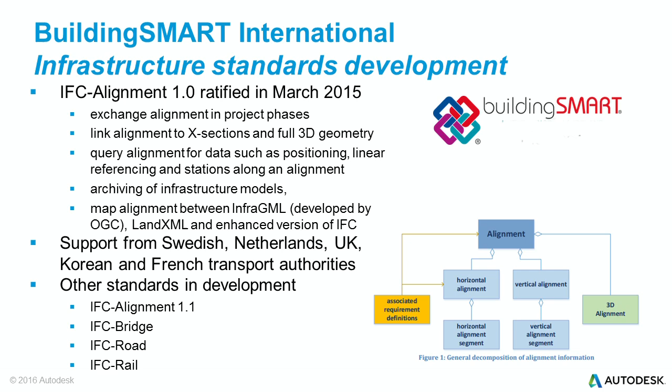China has developed IFC rail, and again, they need to include the IFC alignment. So when you design a road, the core is the alignment, and then the additional part is the road, the rail, or the bridge, so that the bridge sits on the alignment. I'll explain a little more why this is valuable later.

That's an international group. Let's look at a couple of countries. In Holland, Rijkswaterstaat, the National Roads Agency, has been running a program for the last 5 years to have projects deliver better information back to the client. They adopted a standard called COINS, basically a set of documents and data, coming in a zip file that includes a database of structured information - the detail on the assets - GIS, large-scale information, documents, drawings, PDF documents, spreadsheets, and 3D models. It effectively comes as a zip message.

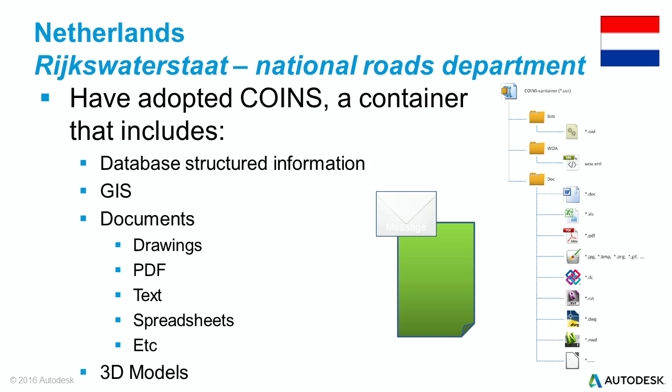The COINS container includes BIM data, structured XML data, and formats like Revit, IFC, DWG, and Navisworks. So it includes the documents, but effectively when the client receives a pack of data, it has everything they want. The COINS schema describes what needs to be in that.

They've now done a number of projects on this, and here's an example of the data that could be found on an object. They're now able to integrate the database and link it to the model data and the geospatial data, so they really are now receiving rich information about their projects, including structured data as well as the geospatial and civil information.

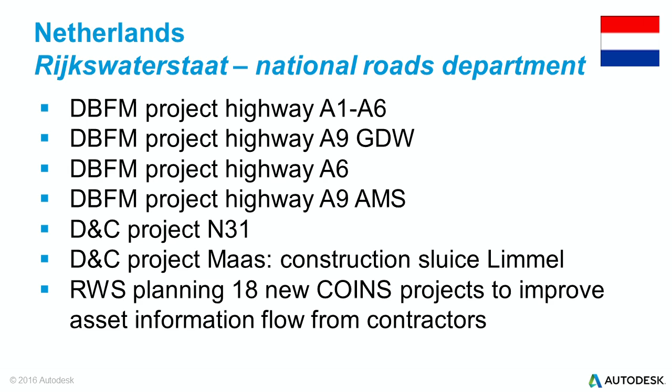Here are some examples of projects that they've already delivered which have submitted COINS information back to the client. So this is something that really is happening. What's great is that the supply chain is learning how to deliver projects in BIM, how to create a COINS data package, and the client receives this better information to introduce into their asset management systems. So they are on a very good learning program in Holland on this.

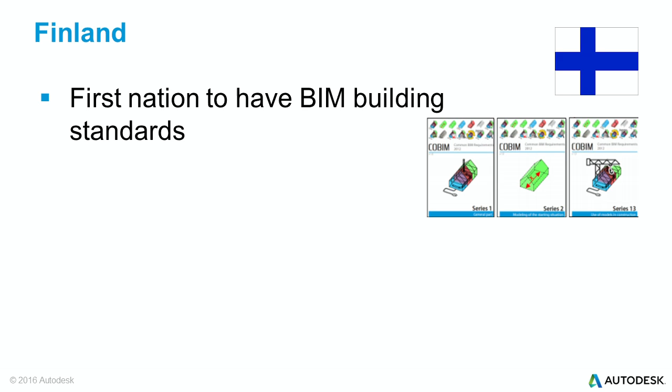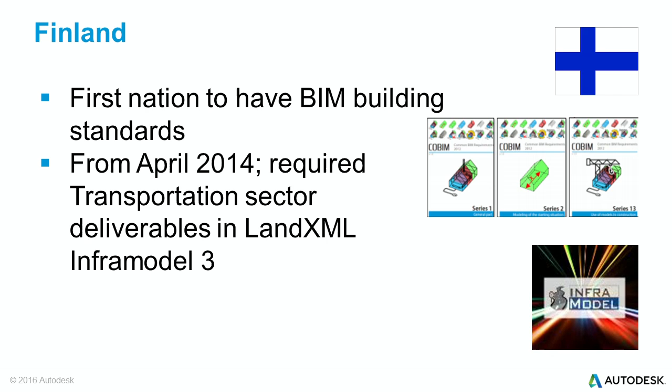We look at Finland. Finland was the first country in the world to have a national BIM standard. These came out, I think, in 2009, so they've had them for a long time. From April 2014, they required the transport sector to deliver in a format called Land XML Infra Model 3. Land XML is a standard for exchanging essentially transport data, and it can link to geospatial and civil engineering tools. Infra Model 3 just includes additional data parameters that the Finnish road agency wanted.

In Germany, they've recognized their inefficiencies in construction, so they've set up a national reform commission for delivering BIM. This year they've actually got an official statement of BIM in their public procurement, so now specifying BIM as a requirement. They have a BIM working group called planen bauen 4.0, and they are doing a phased rollout of BIM across the whole country. Autodesk is the first private sector company to get involved in planen bauen.

As a company, we've committed to helping the German BIM initiative to be correctly developed. The good thing is that the Germans are not trying to do everything - they're doing it in a phased rollout, learning as they go, focusing on the priority aspects first.

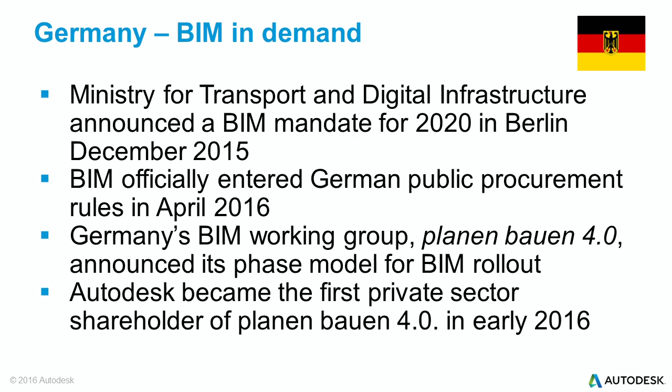Just some examples from America. America does a lot of BIM, so they've been doing BIM for many, many years. This was a project which I thought I would share, which is from the US Army Corps of Engineers, part of their military team. They have a huge number of assets around the United States and internationally. And the National Institute of Building Sciences, NIBS as it's called...

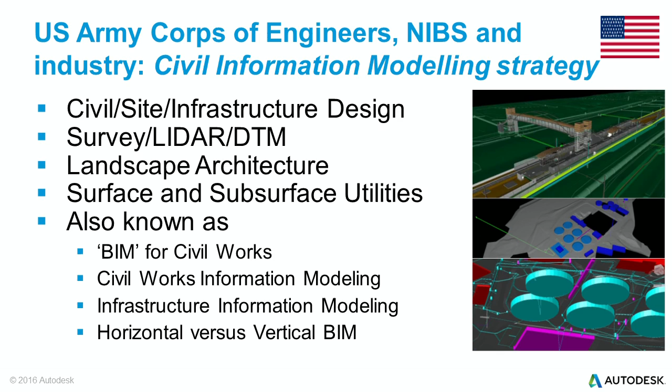They did a project called Civil Information Modeling with industry. They looked at the data we use in civil engineering - civil data, geospatial data, survey data, data for subsurface utilities, pipeworks, electrical cabling. They came up with the idea of BIM for civil works, which is civil information modeling. They looked at saying that typically GIS covers a number of areas going from the world down to sort of a land parcel. When we look at BIM, we tend to talk about things like structures, bridges, buildings, physical assets.

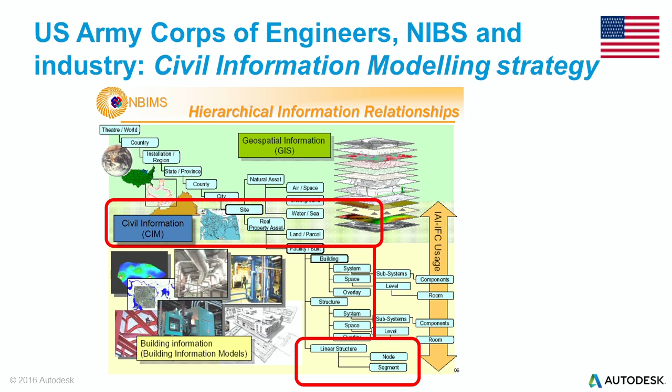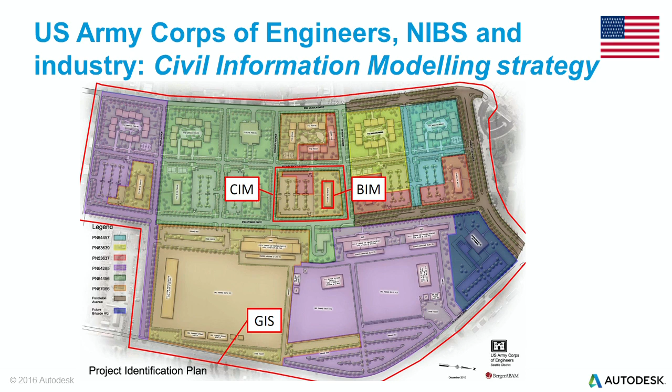And they said that there's a piece in the middle that is poorly handled, which is the more detail around the project area for civil engineering projects, which is where they're focusing this civil information modeling on. And so this study looked at that. And so this is the kind of way of saying that GIS covers the whole area, BIM is the building, but CIM is the project. So that was their kind of idea of saying, well, let's focus on the specific information that we might need there and how might we create it, how might we develop it. That's what that project was about.

This was a report that just came out this year from the US airports. It's an airports report. It had many, many airport clients involved as well as supply chain. And they looked at how are airports in America adopting BIM. In truth, they are doing very well. They've got a lot of projects in BIM, but the client isn't entirely in control. It is mainly being done by the supply chain, the designers and the constructors.

And they found there's some lessons in terms of the clients don't really have much guidance on how should they do BIM and how should they do BIM into facilities management. They don't really know what is good BIM and what is bad BIM. So they need to develop some key performance indicators to show performance. They need to understand how to deliver a return on investment. You know, how do I know that the BIM has given me a payback? Whether it's on the project or it's in operation. They need to learn about this. So they've kind of identified the problems.

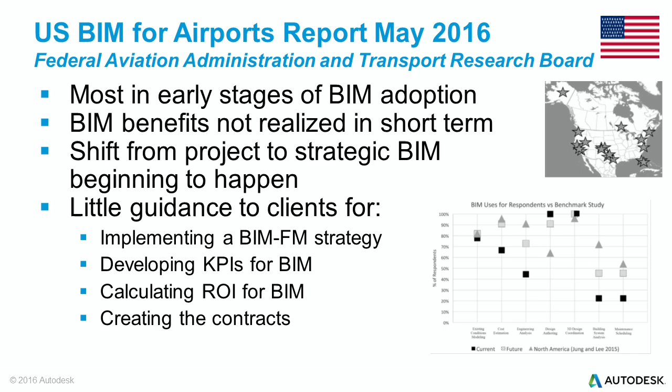And the final one, and I think this is a big problem everywhere in the world at the moment, is including BIM specification in contracts is a struggle because most contracts are very traditional, they're kind of CAD-based, they're very restrictive, and actually with BIM we share models, we hand over intellectual rights, and this is not clear in current contracts. So they know that that's a gap.

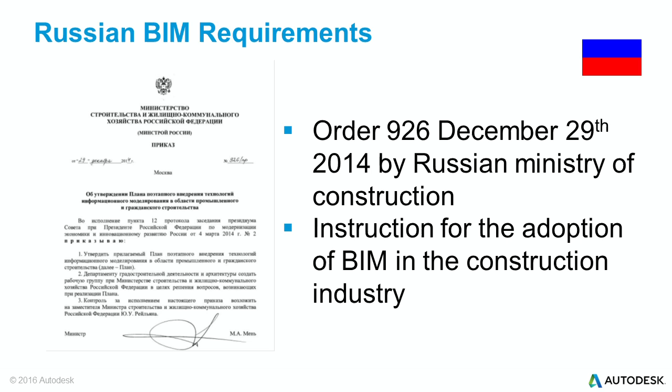Here in Russia, already since December 2014, you've had an instruction for adoption of BIM in the construction industry, and I'm sure that's part of the reason you are here. So this is extremely positive, and you're obviously aware that we've had some BIM standards that Autodesk helped support in the development of. So you've got some guidance on how to do BIM on the project, and this is a great starting point to learn about the beginnings of what should I do if I'm a building designer, and what should I do if I'm a civil engineering designer in my project. So you've got some excellent starting position for learning about BIM on your project.

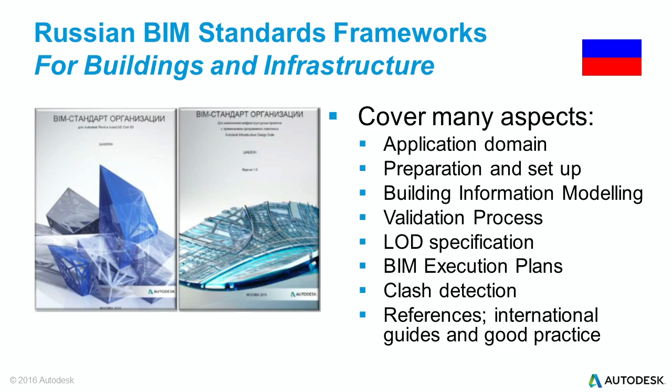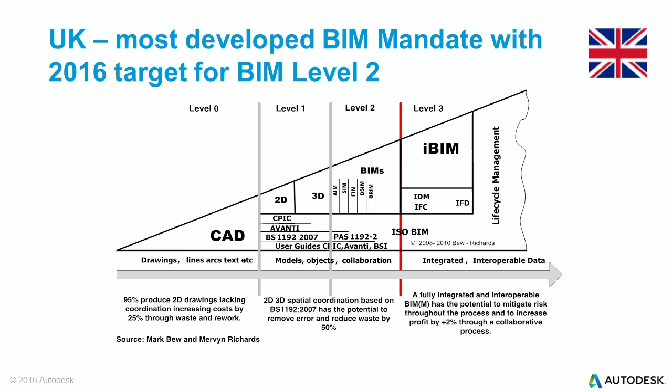So I'm going to spend a little bit more time now just talking about the United Kingdom, where I'm from, and our Level 2 program. So from April this year, every centrally funded public project has to do BIM. There's no question they must include BIM in their specification. And we are trying to achieve a thing called Level 2, which is on this graph, the red line. Level 2 is just a set of procedures and technical requirements that need to be included in the execution and delivery of a project.

This is very complicated. So what we've done is we've tried to help industry by developing a number of guides or standards for how you will do work. We focused firstly on collaborative working. How do I share information with my colleagues on a project? How do I deliver a project in BIM? What should I do with BIM data in operation? What data format can I help to share my information with the customer? How do I specify a project? I'm a client, I have no idea, I have no understanding of BIM. So tools to help the client specify.

What are the contractual changes, the commercial amendments to contracts I need to make? How do I classify things? Can we name assets consistently in our projects? This is a massive problem. In the UK, I'm going to use English language, some people say it's an elevator, some say it's a lift, some call it a vertical transportation system. Are we talking about the same thing? Who knows? So classification, data security. Obviously, we live in difficult times. Can I make sure that the right people are seeing my data?

Because much of our construction sector, we are creating critical assets for the public, make sure that the data about those assets is properly secured. How do I prepare the client, the whole organization, to adopt BIM? How do I include operational information and requirements in specifying projects? How do I train the academic sector? How do we get the right requirements in education?

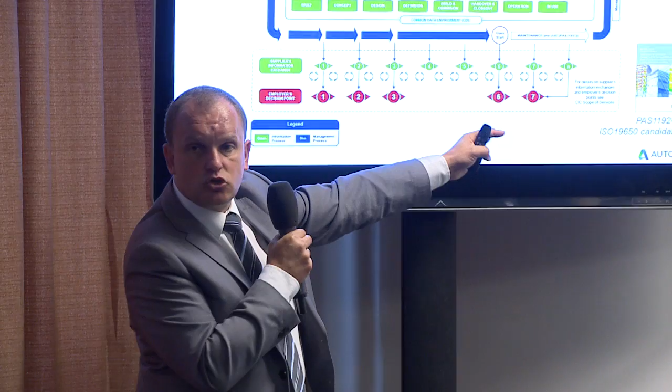This is just a little bit more detail about our capital project delivery process. I'm going to stand here. So this is a project starting from briefing through design, construction, into handover and operation. And we talk about the idea of data exchanges or data drops, where the project must give the customer some data so the customer can check, are we doing what is required? And these are these data drops. How does this all work?

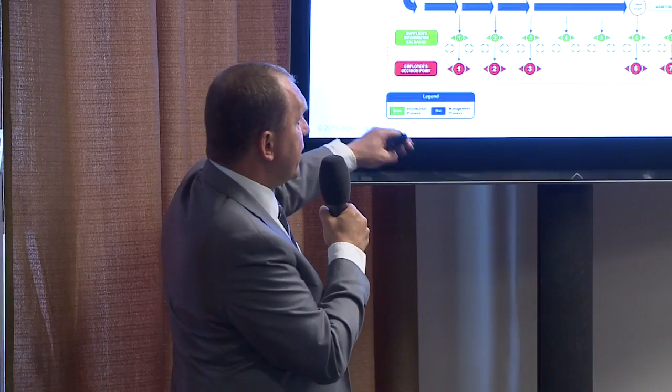Well, actually, it all starts in the top corner here, which is a thing called the employer's information requirement. Now, this is where the customer says, this is the data I need at these points in time, so I can be happy that the project is going to plan, and this is the data I need here at the end, so that I can run my new asset correctly.

Now, this is a massive problem for clients. Most clients buy something cheap. Now we're saying, buy something to meet your requirements. So you need to know what your requirements are. So this is actually a big, big area. So if you're a customer, if you're a client, to do BIM, don't complain if your project didn't do what you wanted, if you didn't ask for what you needed at the beginning.

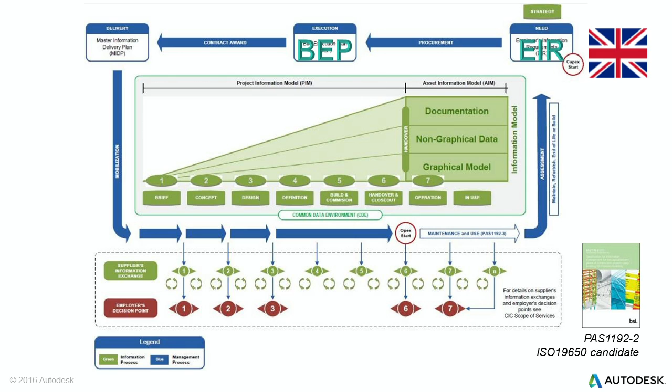Okay, so the client says what they want. The supply chain then delivers a BIM execution plan that says, this is how I will deliver your information. And the successful bidder, who's best BEP, has to then create a master information delivery plan. The big detail on exactly who will do what at what phase. And once you've got these plans in place, you've done a lot of planning, what tools you're going to use, who's going to do it, to what level of information, you can then go ahead and deliver your project.

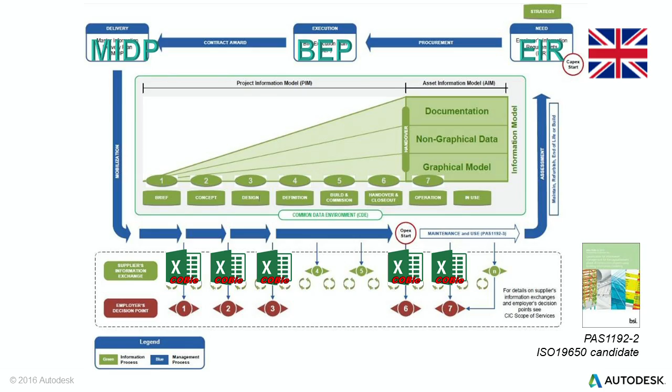And in the UK, we have suggested that we will exchange the data, not models, but the data using a format called COBie, which can be delivered as an Excel file or as a database. So this is quite hard, but we are learning our process at the moment on how to achieve this. But particularly the BEP, MIDP, and the EIR are a real big focus. Ask for what you want, say how you're going to deliver it, and then show the full detail on it, and then go ahead and do this. And I'll come back to this later very briefly.

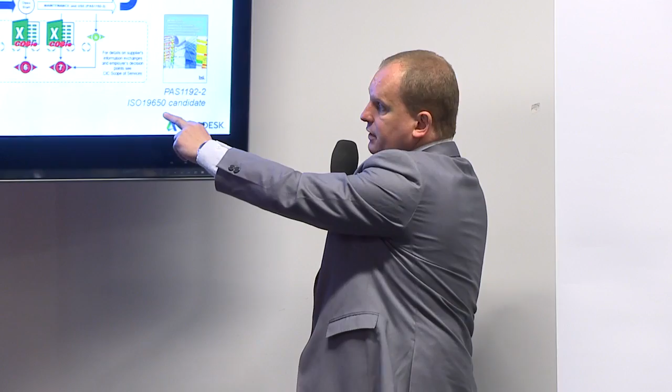Oh, sorry, I just want to say one more thing. This standard, PAS 1192 Part 2, is our BIM for projects, and it is being developed into an ISO, an international standard, ISO 19650, and that is due for publication in just over a year's time. So the UK approach is being adopted as a good role model example for the international community. So this will be the basic framework for future BIM on international projects.

And they've said that BIM is our lifeblood. It's our central nervous system. This project will not be delivered without BIM. And they've come up with this whole BIM framework and model. And I'll just explain a couple of things on this picture. So this is, how are we going to do it? We're going to use collaboration. We're going to get it right first time.

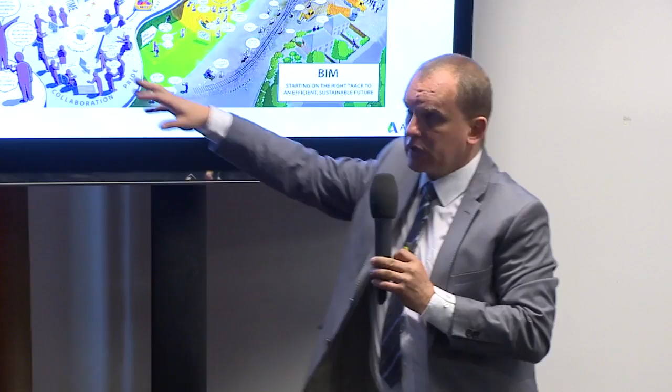And up there, I don't know if anyone can read it, but it says 150 years. They know that the railway line is going to last 150 years. In the UK, and I'm sure here in Russia, you have railway lines that are over 150 years old. When we build infrastructure assets, they're not for 10 years, for 20 years, they last centuries.

And they've got a little picture here of the devil. And the devil is saying, come back to doing it the old way. And this is the trough of despair with risk, which is where we are today. They don't want to do it that way. So they've said that BIM is a way of setting excellence in their project preparation, design, construction. And they've even said they want to build HS2 three times.

They want to design it in BIM. They want to construct it in BIM. They even want to simulate it and run it in BIM before they actually build anything. So they want to use BIM to fully iron out any problems before they actually break ground.

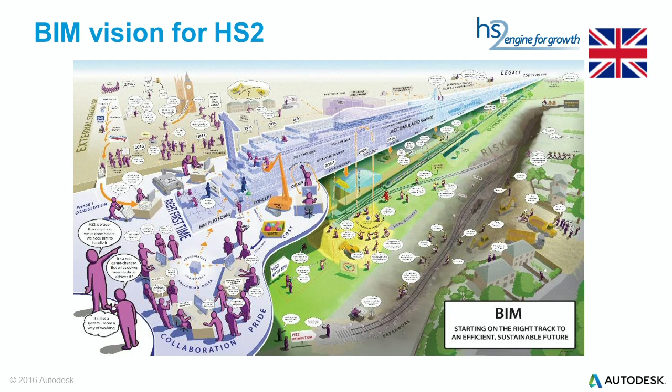So let's move forward. So how are we at Autodesk helping? Well, a lot of what you've seen and a lot I talked about involves some technical stuff. There are things you have to do, which isn't just modeling. It's actually creating and transferring data. So firstly, in civil engineering it has always been very hard to add additional attributes, the extra information around the model objects. So we've actually done a huge investment, which I'm pleased to say I was very much at the heart of developing, to add extended property data to Civil 3D objects.

So effectively, you can have definition of property sets. You can create your own property sets. They can be Russian property sets, they can be client property sets, they can be whatever you want property sets. But essentially, for a model object, you can say, I can add extra information. It's not just what came out of the box, I can add extra stuff. And this will become clear later.

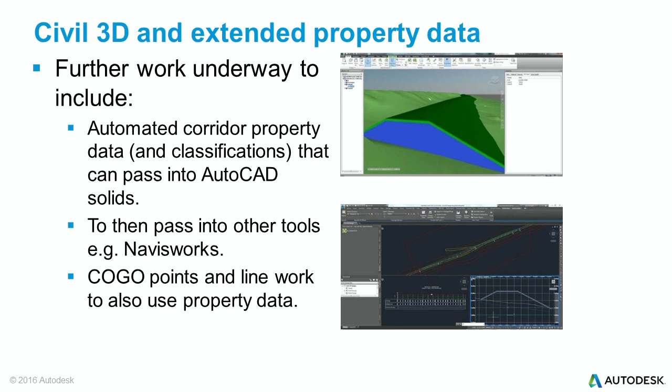And we're doing some further developments around corridor development, and all of this is actually trying to pass the data through the process. So it's less about the modeling in civil engineering than it is to get more data to flow through the different stages of a project. We can apply classification. I mentioned how you name things, the description of the objects. Well, of course you can apply classification to civil objects.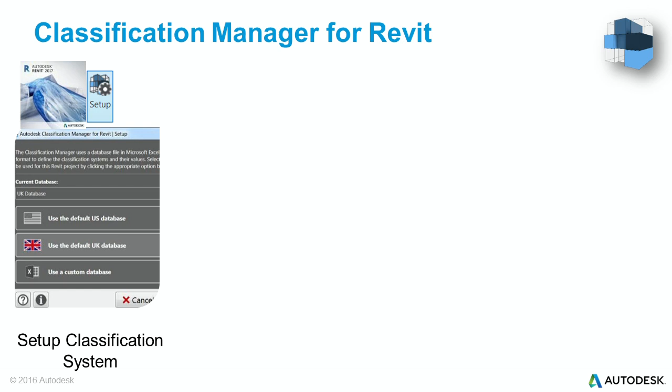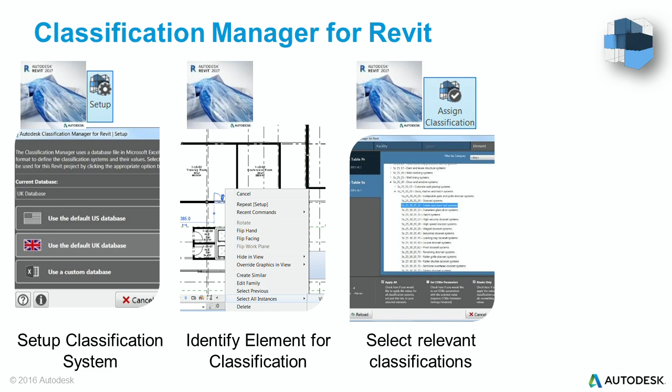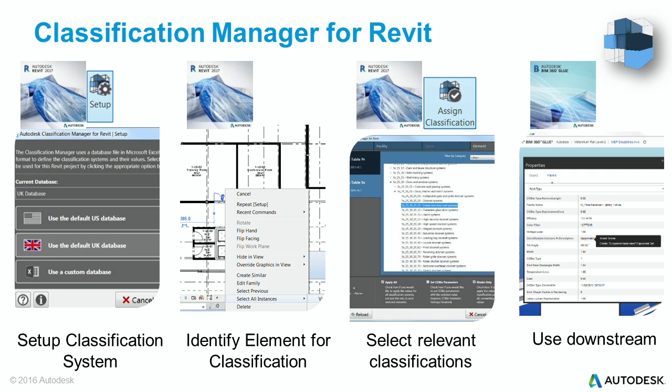Main one is Revit. So in Revit, we can set up a classification system. In the UK, we use a thing called Uniclass. You identify the thing that needs to have some classification. You then select the appropriate classification for it, and you apply it and use it somewhere else. So effectively, you pick on an object, you say, add some classification, add the classification, and then that is now on the object. You can do the same thing in Civil 3D, using these extended property data sets.

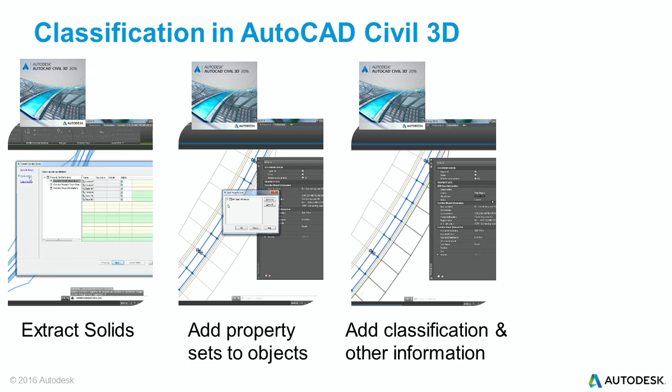So first, you have to do a model, and you extract it as solids. And then on that solid object, you add a property set. So you actually create the property that you want. And then you add the classification as a property. And then, again, that data is now available later in the process. You can get COBie. So COBie may not be relevant to you at the moment.

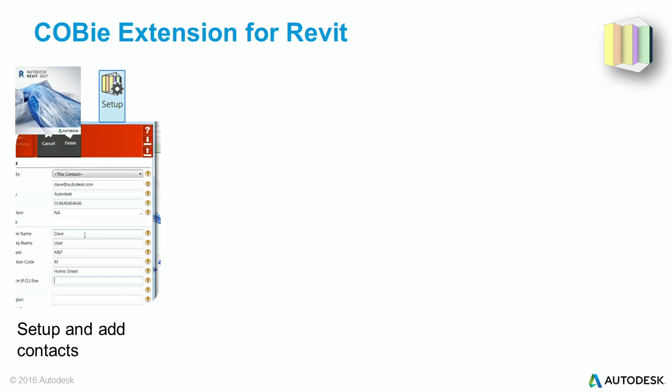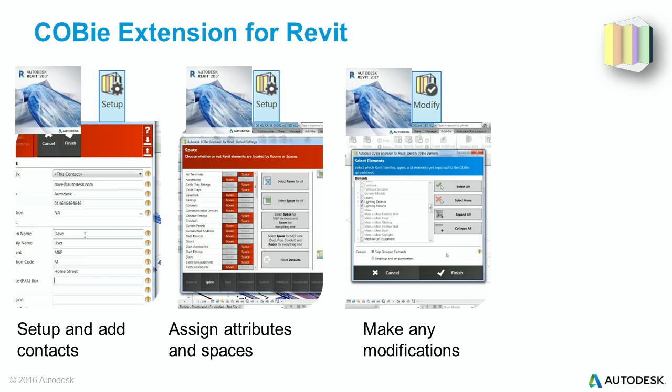Don't worry about it. I'm going to go through this quickly. COBie is a standard structured data set from Revit. We can do it because we have an extension for Revit. So you set up your basic COBie data, you assign fields, you make any changes you want, so you don't have to send all of the objects out. You just say, I only need to extract the information that my client has asked for in their information requirement. And then you have the COBie Excel file. So we are automating the generation of a standard structured data set.

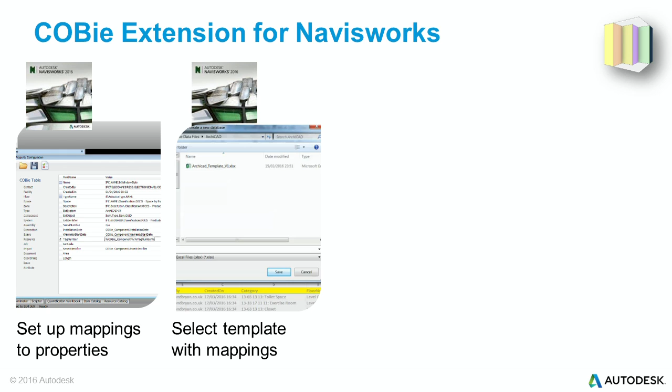We've got a Navisworks extension for COBie. Now, this becomes quite interesting. You know, if we've got it straight out of Revit, why do I need it from Navisworks? Well, because Revit is one product. I may have model objects from not just Revit, but from Civil 3D, from third-party products. So by doing it in Navisworks, we can do exactly the same thing. We set up our, this field maps to that field in COBie. We then pick the template COBie that we want to use, so we fill it into this one. We import the model data, and then we export the file. So we're absolutely simplifying the process of generating a structured data set.

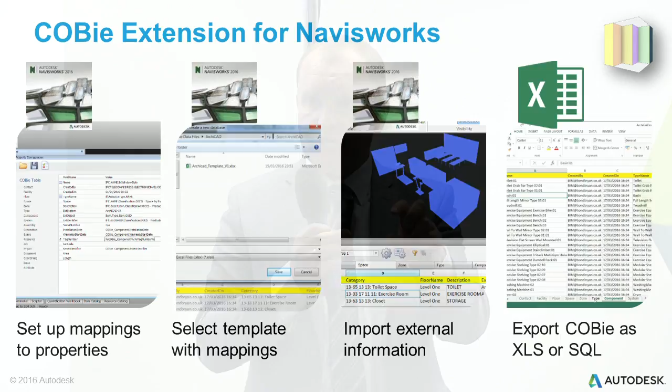Now, this doesn't matter that it's COBie. This is information that a client may want, and they can use that into asset management systems. So they now have data. It's not about geometry. This has got nothing to do with the model. This is, I have these assets, and I know what they are. And actually, most of the data gets filled in the spreadsheet by the manufacturer, the details. The constructor fills that in.

We can even test models. So we have a model test. If you have a set of rules, so standards that you want to obey, we have a model checker that's available. So you select the model checker, you configure it to follow the rules that you're after. You run your checks on the model quality, and then you finally run a report saying what parts of the model meet the requirements that were set. And again, from the UK process, some of this would be defined in the employer's information requirement. So this is a technical way of meeting something that was described at the beginning of a project.

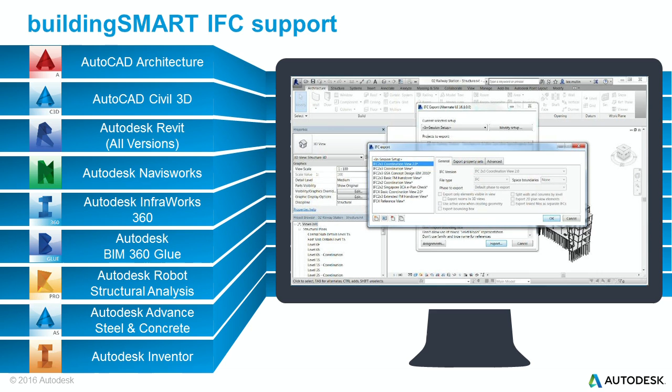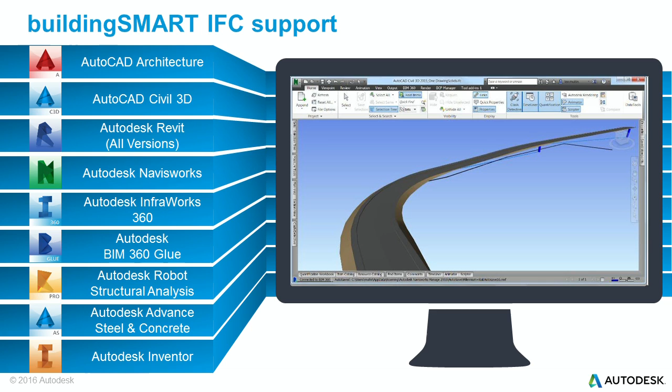Now, interoperability, I mentioned that American report that said about $15 billion of lost productivity due to poor interoperability. I will argue that today we have less problems with sharing information between technologies, using those buildingSMART standards of IFC. As a company, we are massively supportive of this. We support it in around 17 different products, both in building design, civil design, and even in tools like Autodesk Inventor from the manufacturing side. So we're very happy to share and use IFC data. It's an open standard. It's not an Autodesk standard. We're happy to use it. It's not perfect because it doesn't work in every situation, but we're happy to support it, and we will happily support future developments of IFC.

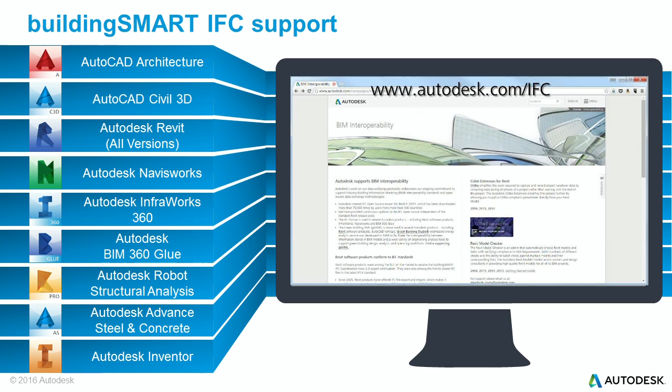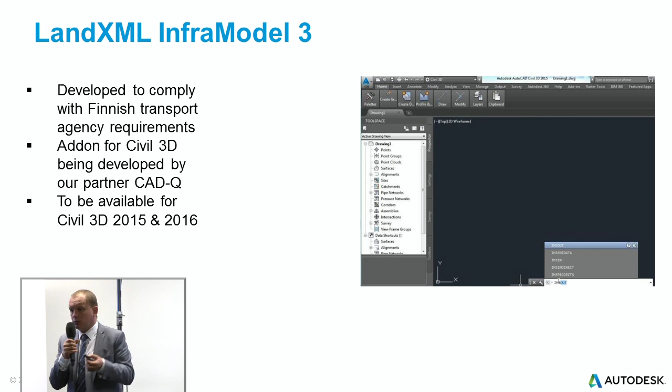I mentioned LandXML from Finland. So we funded a development into Civil 3D for LandXML InfraModel 3. It's an add-on that gives you some additional functions. You can import a LandXML file. It gives you some warnings if things have not fully transferred, but this is a full import of a LandXML InfraModel 3 file. And I actually exported it and then re-imported it, and you see it was the same data. So it can allow for round tripping, even though that's not a main intention, but the thing is working. So we're already supporting a different standard that was a client requirement.

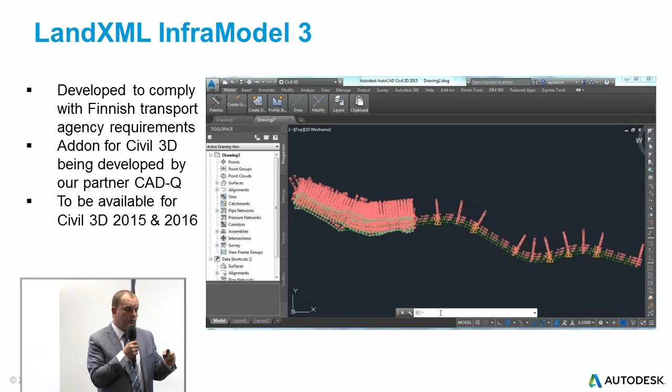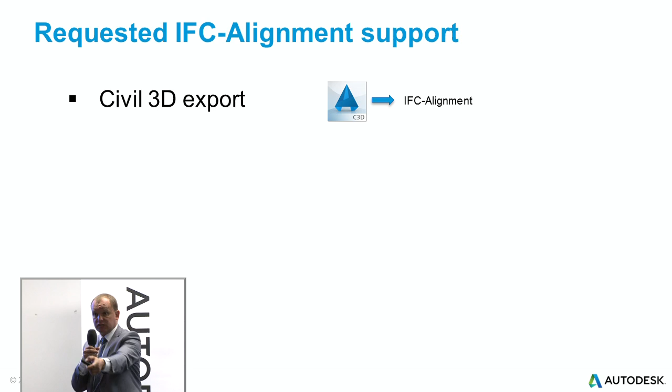We've also been asked to support IFC alignment, which I spoke about earlier around the infrastructure standard for IFC. And the first place is you need to have it out of the civil model. So I've got a road design or a rail design. Can I create the alignment to take that out so I can use it somewhere else? So first request, IFC alignment. Why do I need that? Well, perhaps so I can bring it into Revit. So that alignment now helps me coordinate, for example, a bridge deck.

So that bridge is now set in the correct position. I'm not having to guess. The alignment matches. So this is all about coordination of different stages in the process.

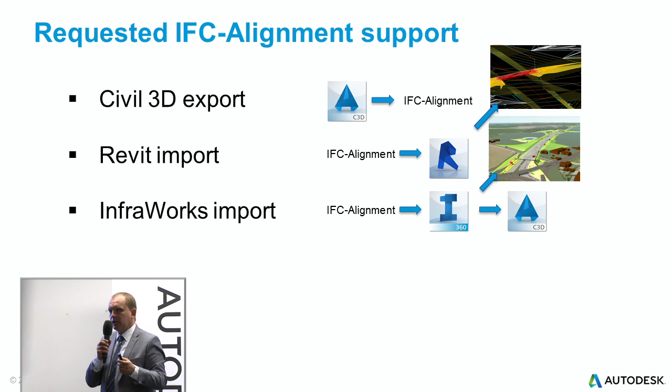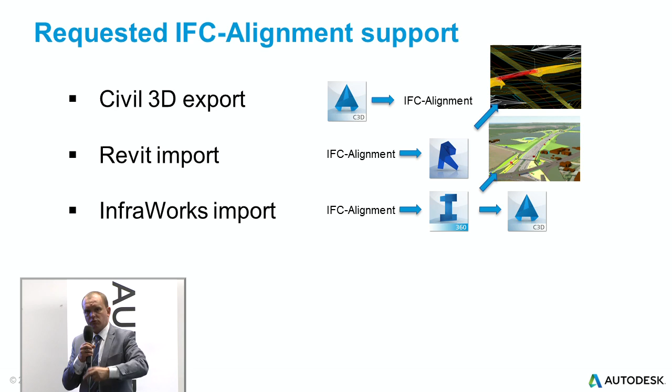Talk about doing it for InfraWorks. Now this is where it gets very interesting, because if your customer says, this is the alignment we want to follow, but all they've been able to do is draw a single line. They haven't got the technical ability to do all the detail. You can take that alignment straight into InfraWorks and immediately create a road or a rail or a pipeline, because it will just translate it into a full object.

Now you can do some optimization on it, and potentially, as soon as you've brought it into InfraWorks, it automatically allows you to share that alignment in Civil 3D. So we have an automatic import into Civil 3D.

We've been asked to do it into Navisworks, because we talked about coordination here with a bridge deck. In Navisworks, we can coordinate all structures and all assets from different modeling packages. If they also include an IFC alignment reference, now everything can be properly coordinated. So this is an aspiration. And finally, Inventor, exactly the same thing, bridge deck coordination.

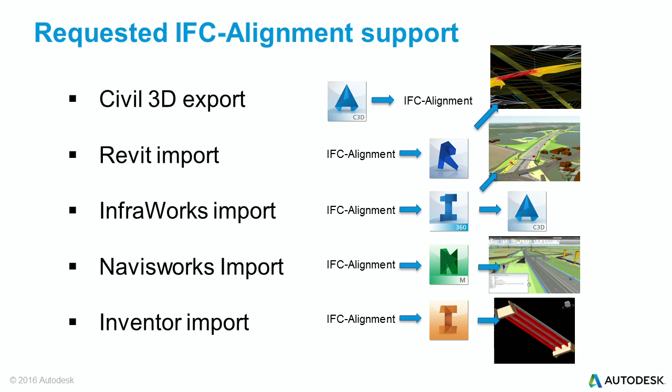So I can tell you today that we are definitely working on the Civil 3D export and import at the moment, and we will hopefully do something with Revit in the short term as well. The others will come in time. We can't do everything because this is quite a lot of work, and actually there are reasons to delay, because obviously they're improving IFC alignment itself anyway, and we want to wait for IFC Rail and IFC Road to see how they manifest themselves. But we are definitely working on this today.

Just quickly now, just a couple of examples of, does this actually work? Am I just showing you stuff? So Highways England, they're our National Roads Agency. They've got this aspiration to be the world's leading operator of roads. And BIM is at the heart of their desires.

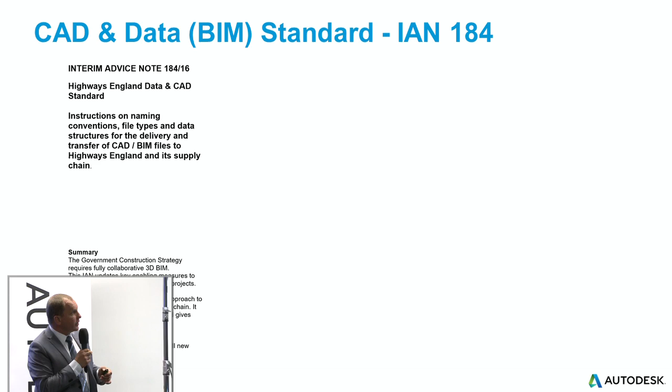They've got a CAD and data standard, which is their BIM standard. It has many references to BIM within it, and it has full focus on aligning. It says here, PAS 1192 Part 2, so those standards I showed you earlier, they're saying they're going to follow the UK guidance. So the idea is to do it the UK way.

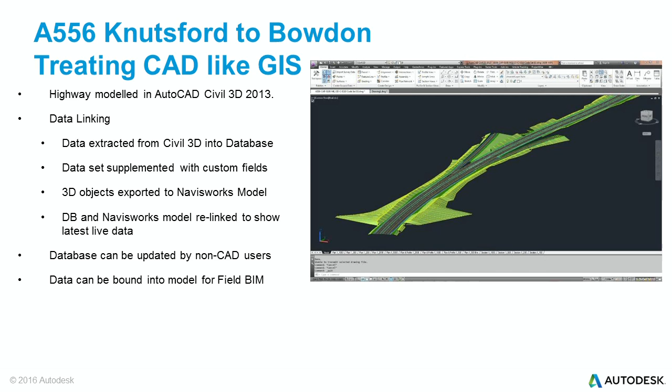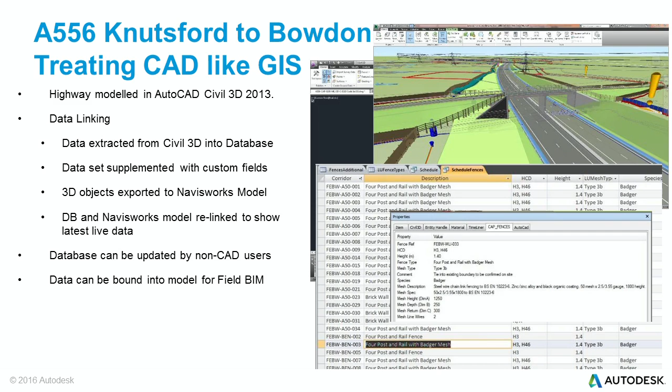They've got some examples. This is one of the first pilot projects. They were looking at linking CAD, treating CAD at the time like GIS. And so they were linking model data to geospatial data, creating databases of information around the project assets. They very much focused on the idea of getting data linkage between the different technologies they were using.

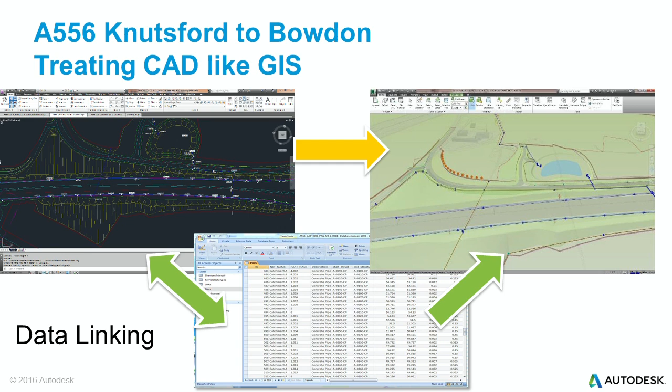So Civil 3D would then link to a database, which would then link to a full geospatial model as well. So they were trying to make sure that everything in the database linked to something in their CAD and their model files and their geospatial files.

They have a big program called Smart Motorways, where we're installing lots of signage, electronic signage, new telecommunication systems, and also ensuring people can use the hard shoulder as a way of running extra capacity. They have a BIM program, a whole BIM toolkit they've developed, which is every project on that program is going to use BIM. They're even looking at creating standard libraries of objects. These are approved model objects you can use.

So that's Highways. This is another quick example of the Environment Agency. This is an example from one of our customers, Mott MacDonald. Was anybody here last year? No? Okay, no, Tom actually came to Russia last year, and he spoke a bit about what they were doing.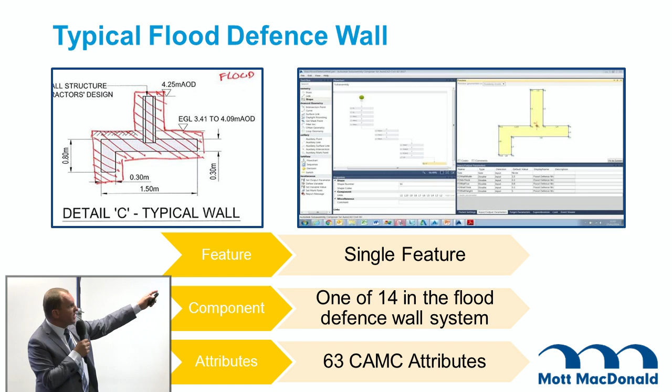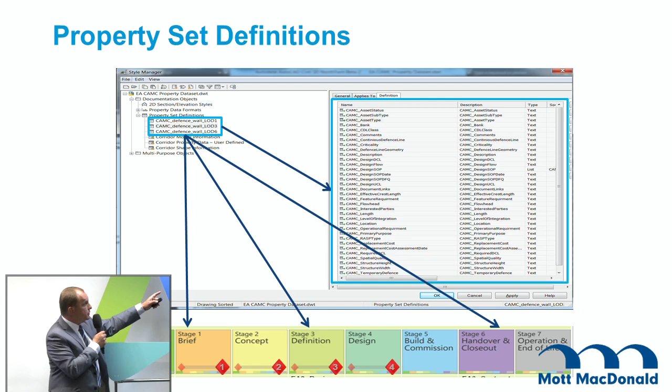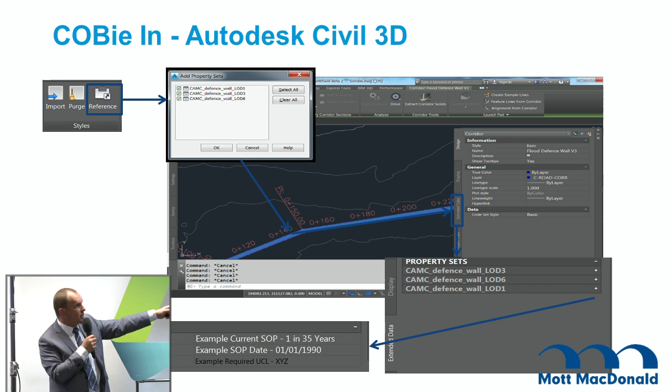And so this was a typical detail of a wall for the Environment Agency, and then they've used property set definitions, the things I talked about earlier with Civil 3D, where they've said we've got property sets from the client, so we can apply them at different phases of the project. And using Civil 3D, we can take those property sets, we can create a reference to them, and we can now create those extra definitions that don't exist in Civil 3D that the customer wants. And now we can use that data downstream.

So we're taking a civil model into Navisworks, and that same customer-specific information is now available further in the process. And we can even use the COBie plugin to create that now as a COBie export, which, if you remember earlier, I showed you the Environment Agency aspiration of we set our requirements, the supply chain delivers models, they aggregate them, and they pump out COBie. So Tom's example proves that this is now possible. So it's the first time we've been able to get this whole workflow going.

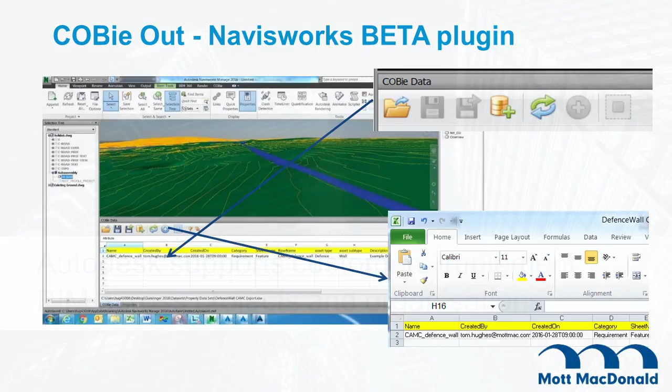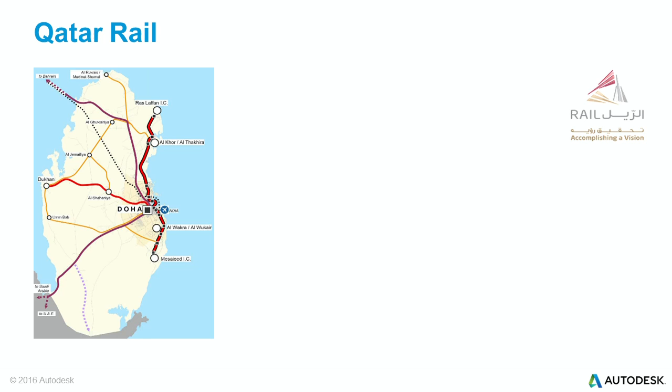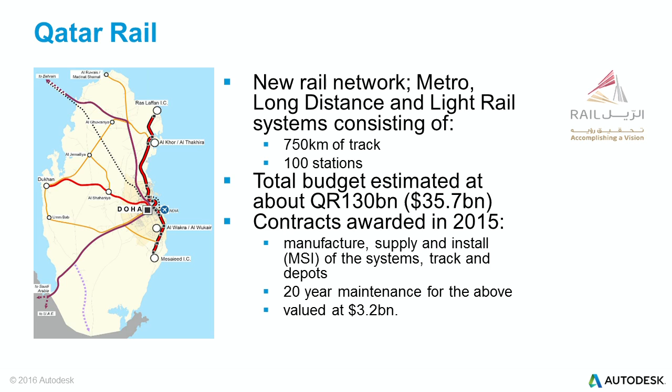And as a company, we are helping customers adopt BIM as well. So my final example of Autodesk support is really, we've helped companies like Qatar Rail. Qatar Rail is a huge investment in rail, 130 billion Qatari riyals, which is over $30 billion. They've got lots of contracts, 20-year maintenance projects just awarded for $3 billion.

And they've got the metro, it's not just rail, it's metro as well. We've had a 3-year plan with Autodesk Consulting, and we've developed BIM guidelines, a technology platform basis. So Qatar Rail now has a new technology set in the organization, and we're looking at many different aspects, also looking at UK standards again, and international standards as the basis of how Qatar is going to be done.

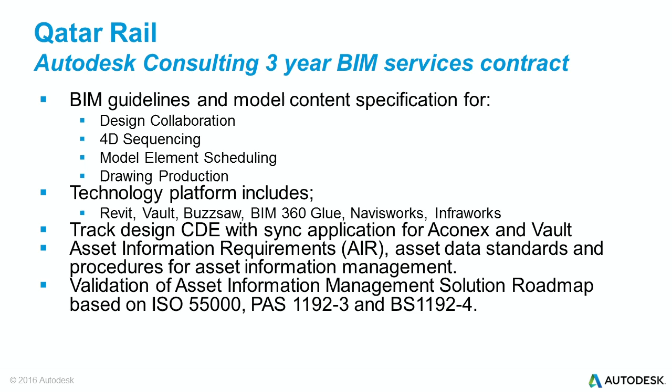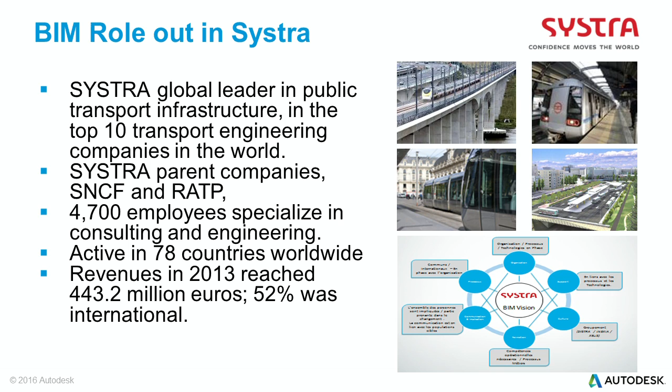Systra, a French company doing rail. We've been working with them for a number of years. They're a large company doing typically rail, infrastructure, and buildings projects. It's been a very successful program. They've got their own framework now for doing BIM in the company.

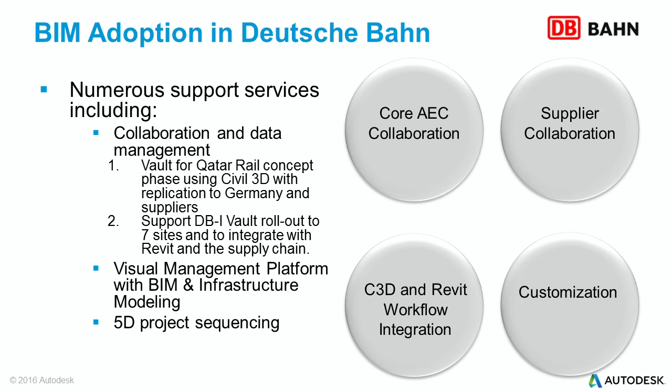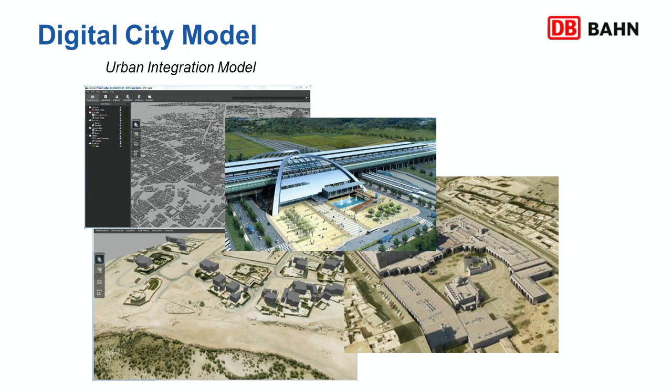Deutsche Bahn, very similarly, we've been working with them to deliver BIM on their projects. And they've got the idea of a digital city model for urban integration. So Deutsche Bahn see BIM as the heart of how they're going to deliver infrastructure in the future, and planning as well.

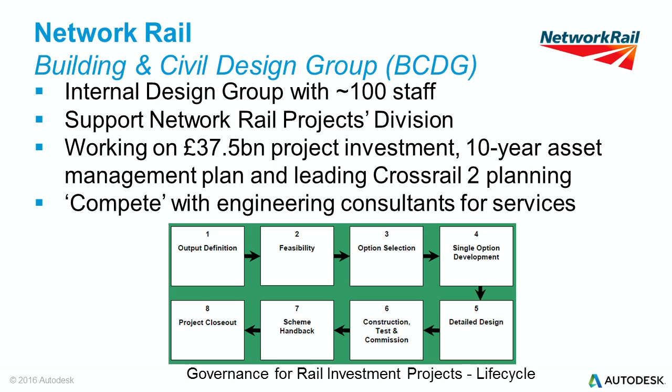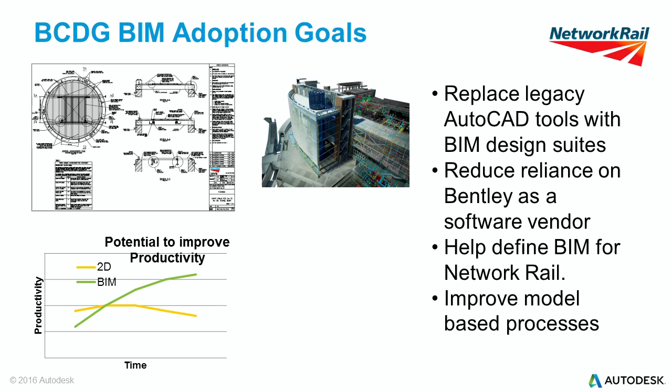UK Network Rail, I've been working with them for 5 years. They're adopting BIM. They do typical small projects, small stations, small platforms. They wanted to get rid of old CAD. They wanted to meet an impossible productivity improvement that they couldn't do in CAD. They wanted to use BIM to get productivity improvement. They had to do what the supply chain was doing, so they were doing this when the supply chain was doing that.

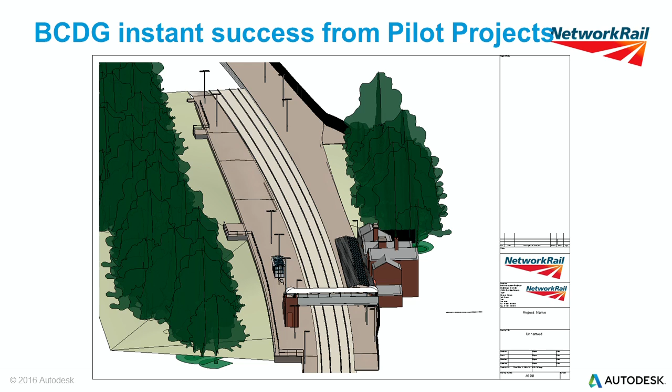And they needed to meet the UK government standards. Instant success on their first projects - they used Revit to do a footbridge. They were able to create a project in half the time they did in their typical CAD projects. And they've just repeated it. So they just said, we're not going to go back. This is a much better way of working.

HS2, we've been working with them. They've got their strategy for BIM, we mentioned it earlier. So we've worked with them, and they want to have a strategy where every vendor's solutions can be used - it's not going to be one solution set. A report was generated by Autodesk Consulting that showed that you can do BIM on HS2, which is a 15-year project. And the idea is that we'll hopefully use open standards in the future.

Today it's not possible, but it's going to be using both Autodesk, Bentley, and other vendor formats and open standards. And HS2 is going to invest in open standards development for BIM and to learn how to do BIM on a massive rail project. So they're going to learn and we're going to help them do that.

So finally, I think I've tried to quickly go through some of the technical requirements, why we need BIM, what standards are out there, what customers are asking for, and shown how Autodesk is helping deliver those customer requirements. To me, BIM is a reality, not just an aspiration. Coming back to this UK model, we talked about the EIR going into the BIM execution plan, going into the master information delivery plan. The things I'd like to say I've shown you is that there are technologies you can use.

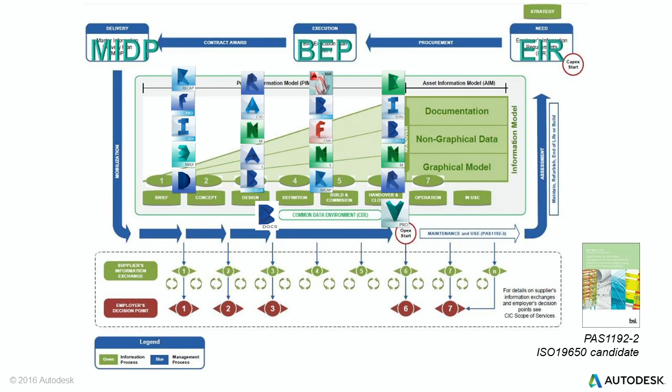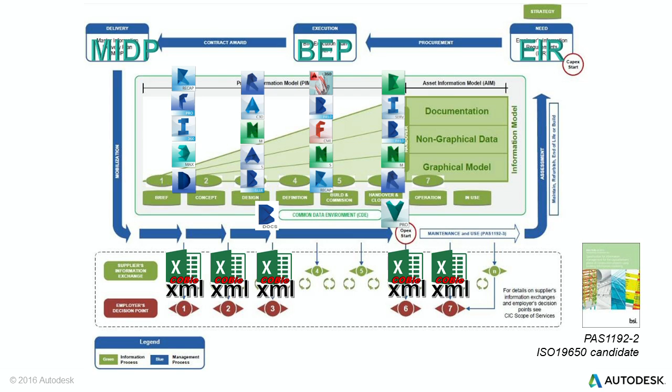And this is the great thing with BIM, is you use different technologies at different times in the project. So you get more and more detail, you add additional information, and you have different tools to use into operation as well. I think you must look at using data management tools, such as Autodesk Vault, during the project. It's very critical to have that because BIM is more complicated to manage. And then you can hand over the data that the clients ask for because we've got the tools to deliver that. All the things I've shown you are available on that link, biminteroperabilitytools.com.

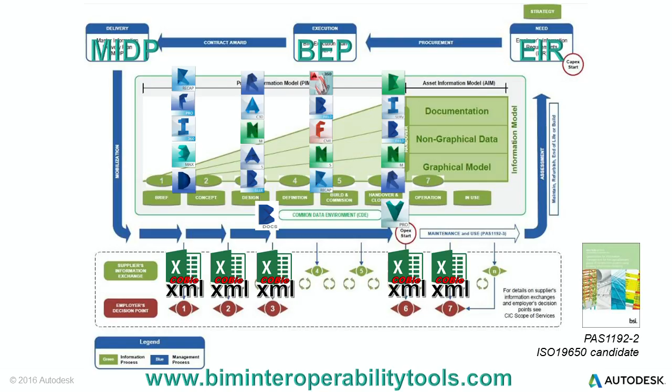So if you do need to use any of those technologies or you're interested in looking at them, please feel free to download them - again, they're all for free. And I'm sure you're going to be delighted to know that that is the end of my presentation.